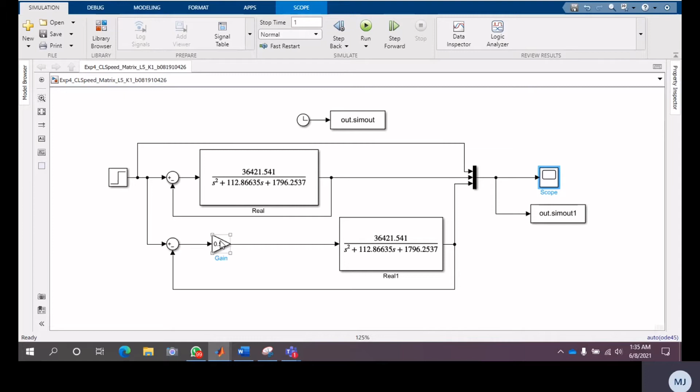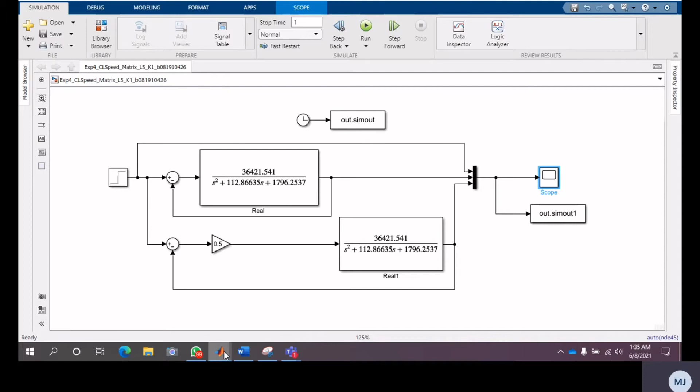Okay, for part 1, I will use 3 different inputs at the proportional gain, which are 0.5, 3, and 5. For the first step, I will use 0.5 as an input, the second, I will use 3 as input, and the third, I will use 5 as an input. Okay, I will use the command window to plot the graph.

Okay. For input 0.5, I will use in the command window t = out.simout.data; k1 = out.simout1.data; save t, save k1, plot(t, k1).

For the 3 input, I will use t = out.simout.data; and this one I change to k2 = out.simout1.data; save t, save k2, plot(t, k2). And

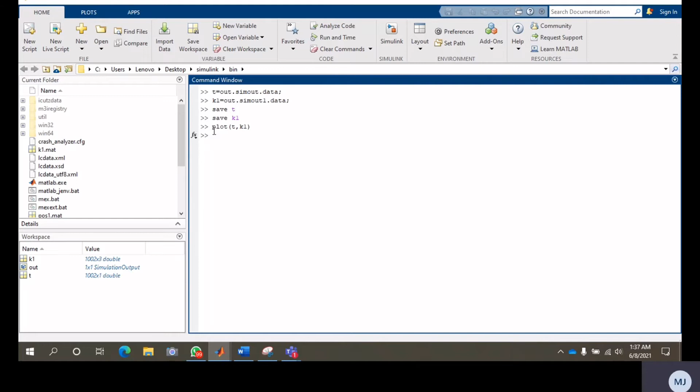for input 5, I will use t = out.simout.data; and then I change to k3 = out.simout1.data; save t, save k3, plot(t, k3).

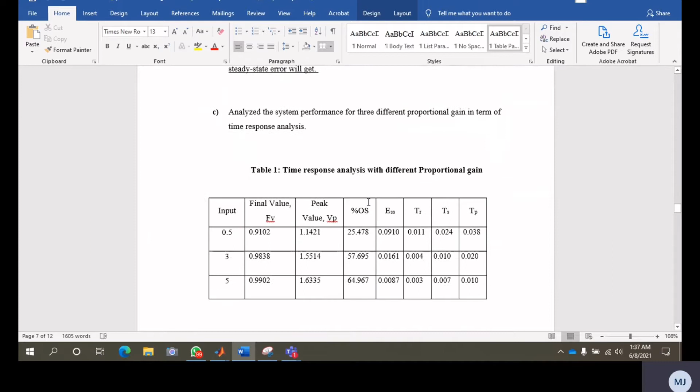Okay, for that, okay, this is the data for part 1. We use 3 different inputs, 0.5, 3, and 5. Final value for 0.5 is 0.9102, for 3, 0.9838, for 5,

0.9902, and peak value for input 0.5 is 1.1421, for 3 is 1.5514, for 5 is 1.6335, and percentage of overshoot OS for input 0.5, I get 25.478, for 3,

57.695, and for 5, 64.967. ESS 0.0910, for 3 input, 0.0161, for 5 input, 0.0087. TR for 0.5, 0.011, for 3, 0.004, for 5,

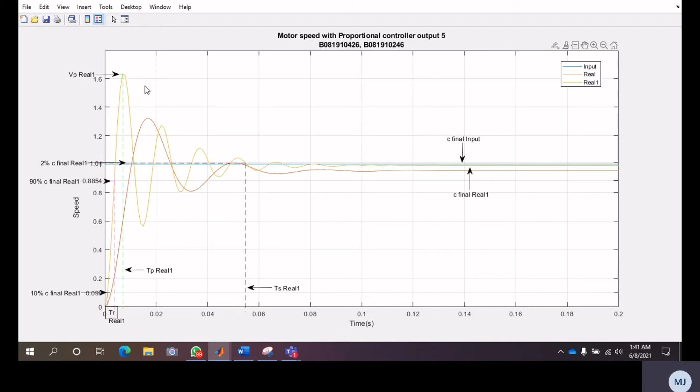And let's move to the graph for motor speed with proportional controller output 5. Based on my observation, this graph is the same as output 3. The value of peak and final value for real one is higher than real. As we can see, the value of C final for real one is approaching the value of input compared to real.

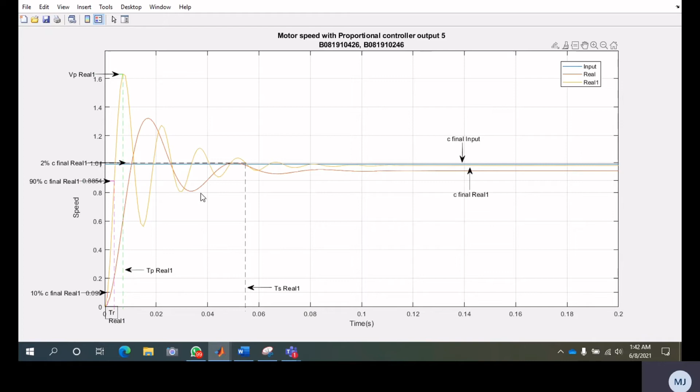Besides that, the steady state error for real one is also lower than real. The percentage of overshoot OS for real one is higher than real. This high overshoot is shown when the motor is moving before reaching a steady state and it has exceeded the predetermined input. This is shown by the shape of the graph below. The amplitude graph for real one is higher than real. Okay, let's move to the task.

This is the task for part 1. From your observation, what is the difference between the result with and without proportional gain? From the observation, we can observe that the difference between the result with and without proportional gain is the percent of overshoot. The percent of overshoot without proportional gain is lower than with proportional gain, while with proportional gain, the percent of overshoot is higher than without proportional gain. Then, with proportional gain, we will get the desired output with less percent error.

How significant is the result obtained using different proportional gain values? From the result, proportional gain will produce high steady state error and percent overshoot. The higher the value of proportional gain, the higher the percent overshoot we will get. Besides that, the higher the value of proportional gain, the lower the steady state error will get. I think that's all for part 1.

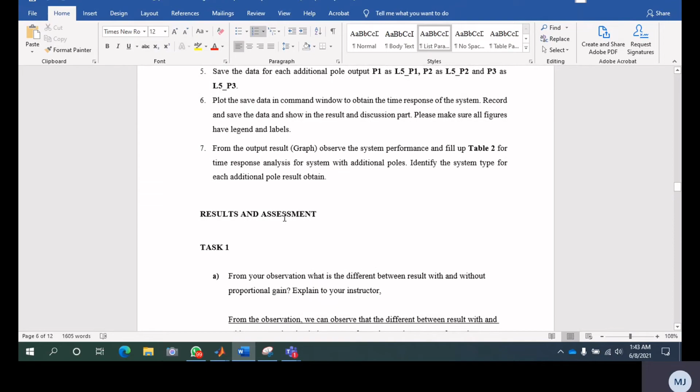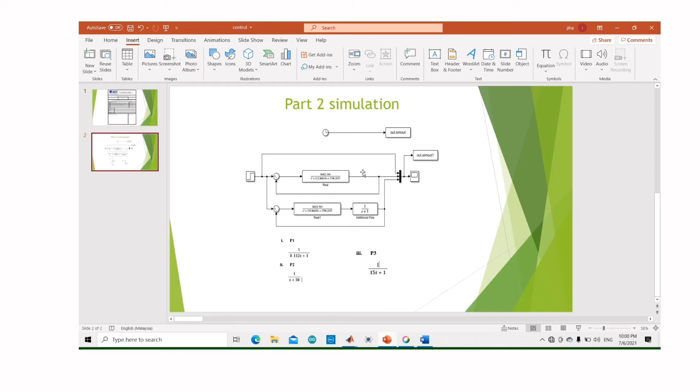So, as you can see here, this is the transfer function that will be used when we are doing this simulation. So there are 3 data that will be added into the additional pole, which is for P1, 1 over 0.112s plus 1. Next is P2, 1 over s plus 50. And last but not least is P3, which is 1 over 15s plus 1. Next, we will proceed with the simulation.

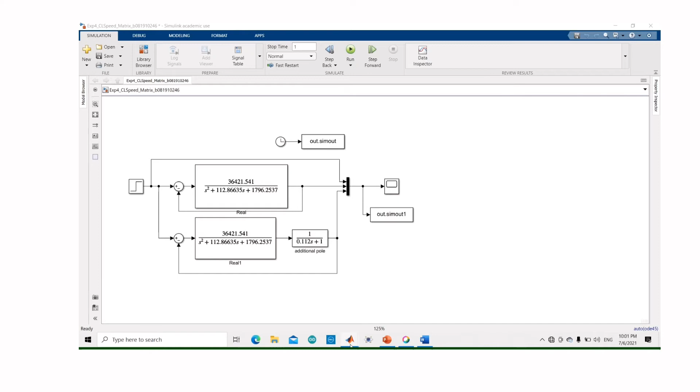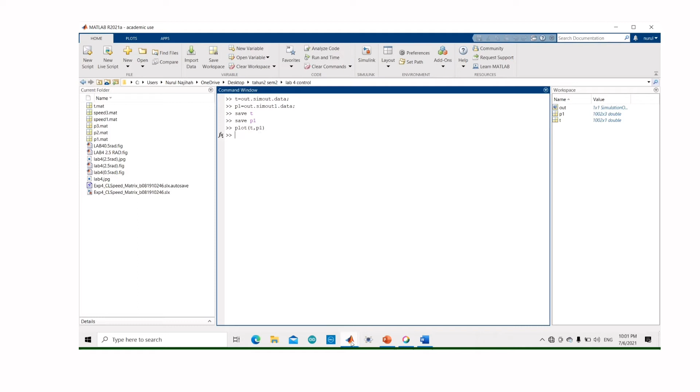This is based on P1. As you can see here, the additional pole is the transfer function for P1, which is 1 over 0.112s plus 1. Okay, after we run the simulation, we will write the command on the command window. So as you can see here, this is how I plot the graph. After I plot the graph, which is plot t, p1, this graph will be obtained. So it's already complete here. The x-axis represents the time, while the y-axis represents the speed.